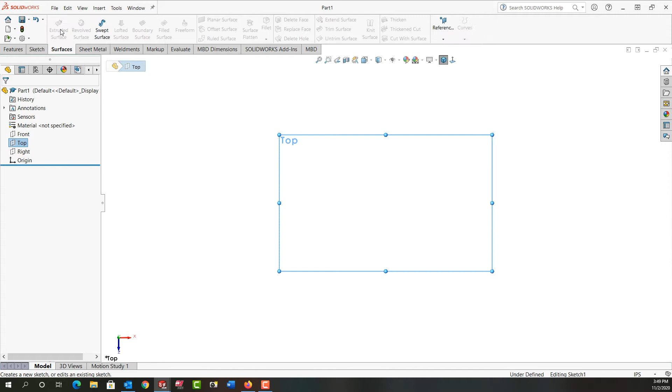The first sketch I want to make is in the top plane, so I'm going to select the top plane, then extrude surface, and I'm going to start by sketching a center line from the origin that's horizontal going this way. I'll push escape. And then I want to sketch a 3-point arc. So I'll select it. I'll come down vertically below the origin and click to start. Move over here, click, then move down and click.

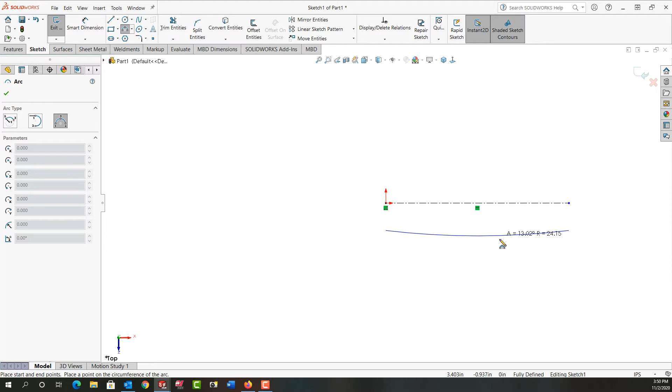Now I'm just going to fit this geometry to the screen. And I'll use mouse gestures to activate Smart Dimension. So this is 4 1/4. And the distance from the origin to this point is 7/8. And then the distance from this point to this point is 5/8. And the radius itself is 5 inches.

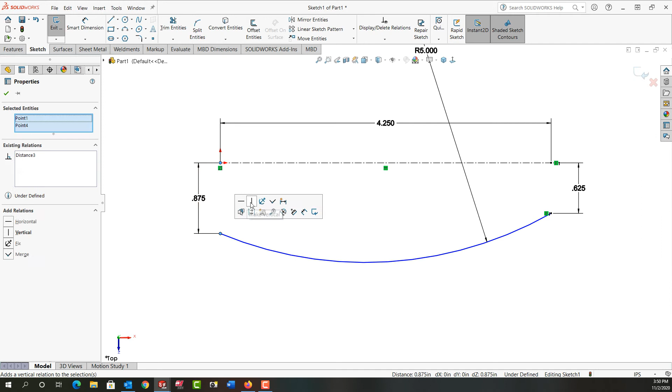So I've added all the dimensions. I'm going to push escape. And then these two endpoints will be vertical. And this endpoint will be vertical with the origin. My sketch is fully defined. I'm just going to look at it isometrically. I'll right click and exit my sketch.

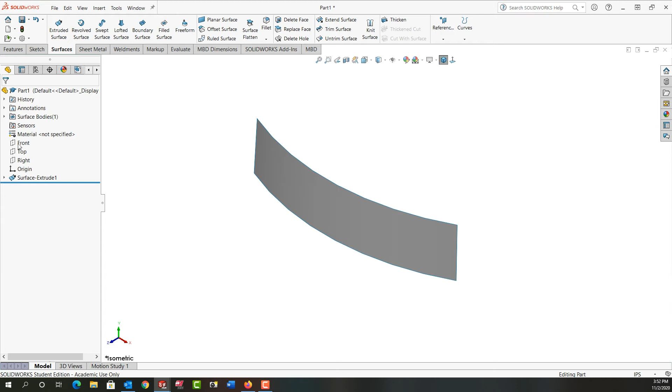Then I want to make the extrusion 1 inch distance, and I'm going to add 3° of draft. And I'll say OK to accept that. I want to make another extrusion, this time working in the front plane. So I'm going to pre-select the front plane, tell it I'm making an extrusion. I'll look normal to. And again, I'm going to make a 3-point arc.

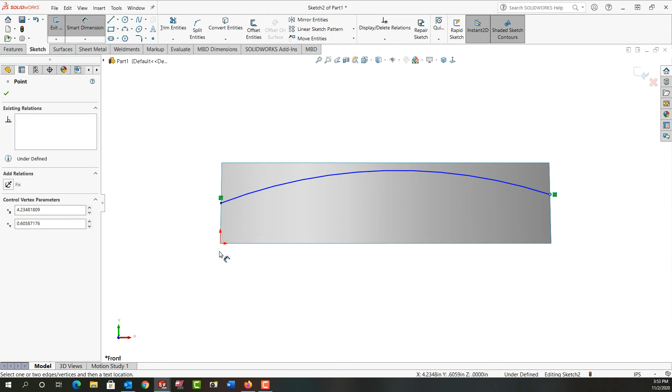Now this arc can be locked to the midpoint here. Then I'm going to come over and lock it to the side here, but not the midpoint. And then move up and click to create the arc. Again, I'll use mouse gestures to activate Smart Dimension. And the distance from the origin to that endpoint is 0.425. The radius itself is 5 inches.

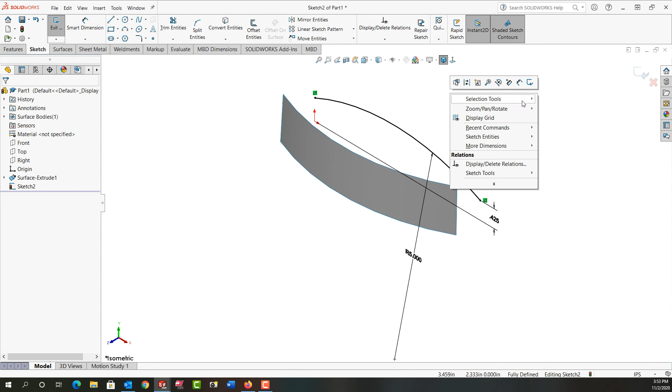I'm going to push escape because I have a fully defined sketch now. I could have also dimensioned this up 1/2 inch. I'll look at it isometrically and I'll right click and I'll exit the sketch. So this extrusion I'm going to make 1.5 inches long without any draft, and I'll say OK.

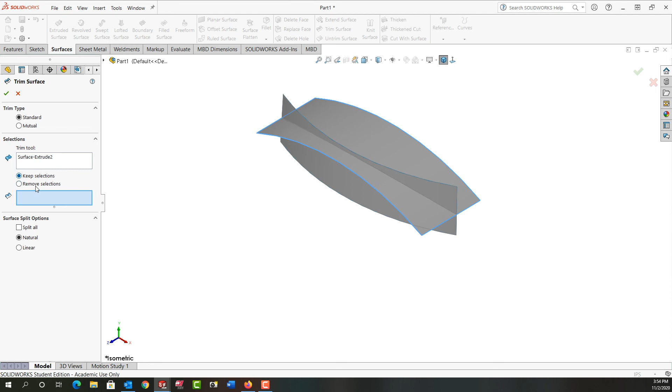So now I have these two surfaces, and I'm going to use the surface trim to remove this portion of this surface where it's above this. So I'm going to activate trim surface. I'm going to tell it a standard one. This surface is my trimming tool, and I can tell it again what to keep or remove. So I have keep selected, so I'm going to tell it to keep this, and I'll right click to accept that. And there's what we have so far.

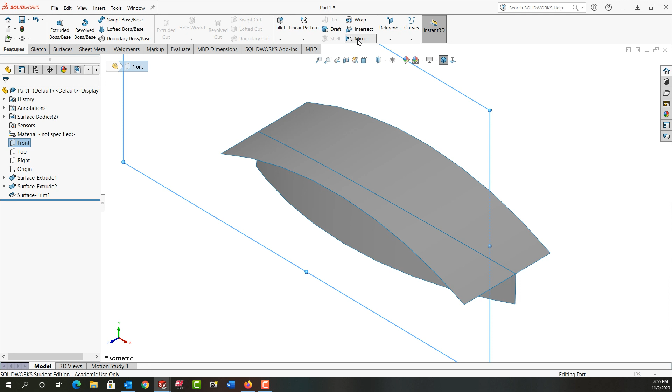So I'll just look at it isometrically, and next I want to select my front plane, and with my front plane selected, I'm just going to go back to the features ribbon. I'm going to tell it I want to use this as a mirror plane. I'm going to expand the bodies to mirror, and I want to mirror this body. So I see the preview and it looks good. So I'm going to say OK. And now I've mirrored that body there. And in the next video, we'll continue from there.